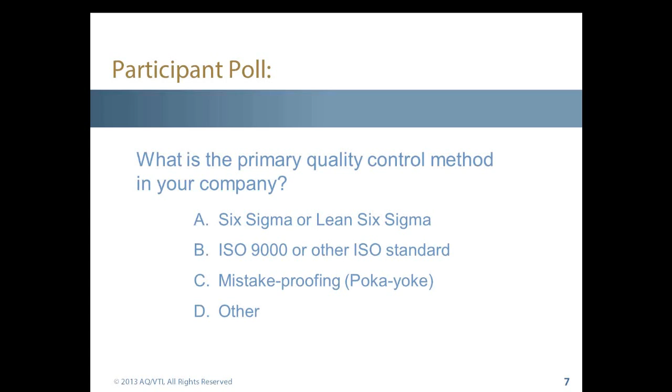The results are coming in, Martin. We'll close it here in just a second. Looks like the results, Martin, 21% Six Sigma or Lean Six Sigma, 49% ISO or other standard, 9% mistake proofing, Poka-yoke, and 21% other. Excellent, thank you.

One of the most important questions that you can ask is, does your quality control pay? In other words, are you saving more than you're investing in your quality control efforts? We're also going to talk about the secrets to mistake-proofing devices and then controlling variation with settings rather than through statistical process control.

This study was conducted by the Xerox Corporation in the 1990s. It included companies that were using Six Sigma, as well as companies that were generally focusing on traditional statistical quality control methods. The data here shows that most companies had defect rates in the range of 1,000 to 10,000 parts per million, and that the cost of their quality control effort, which included scrap, rework, repair, warranty, and quality control, was an astounding 6 to 24% of their production budget. This is the view that quality control is expensive.

Now, what is interesting is that many companies confuse the tools that they're using with whether or not they're achieving outstanding quality control. The difficulty is, for example, there's one company that I know of near me in the Logan, Utah area that claims to be a Six Sigma company, but their own data on the defects in their records is that 8% of the records have defects in them, have errors in them. Well, an 8% defect rate isn't anywhere near the expectations or standards of Six Sigma in terms of the actual defect rates. So outstanding quality control does not depend upon the tool that you use. It is measured in the results that you achieve.

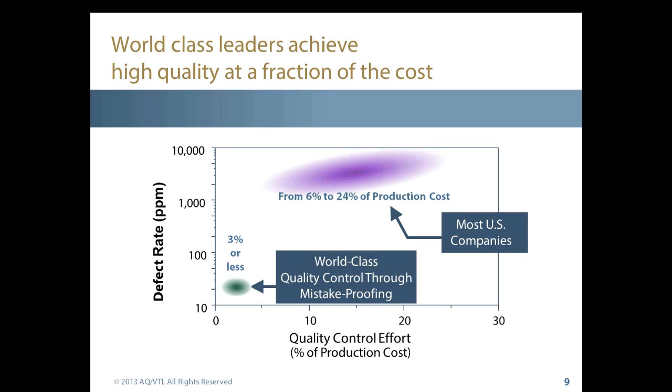This same study concluded, again this was in the 1990s, the world-class leaders in quality control were consistently maintaining their defect rates below 30 parts per million. And these same companies were spending less than 3% of their production budget on scrap, rework, repair, warranty, and quality control costs. This constitutes the view that quality control is free. In other words, what they invest in the quality control effort is almost paid for by the outcome in the results. So these represent the two dominant views of quality control that existed in the early 1990s, that quality control is either expensive or that it is nearly free.

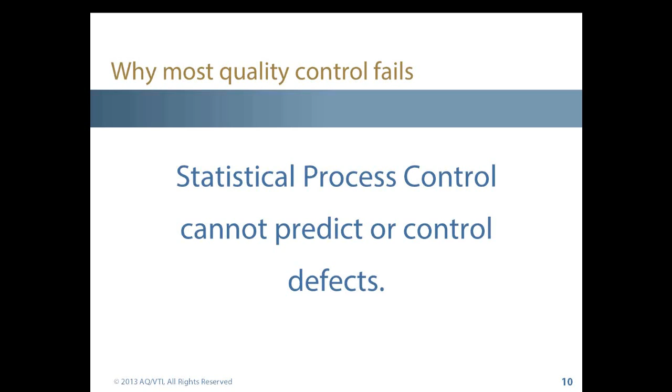One of the questions that we have, though, is why do most quality control efforts fail in the sense of achieving world-class quality? And the rather remarkable reason for this is that statistical process control can't predict or control defects. Now that sounds like a contradictory statement, given that many organizations heavily focus on statistical quality control methods. But the truth is that none of the statistical methods are accurately predicting modern defect rates.

The big problem is that most defects are caused by mistakes, and mistakes are rare random events. They don't happen very frequently. Most defects happen because mistakes happen, and mistakes are rare and random events. You can't predict when they're going to happen. You can't predict how severe the outcome will be when they happen. And because of this, statistics are an ineffective tool in dealing with the problem of mistakes.

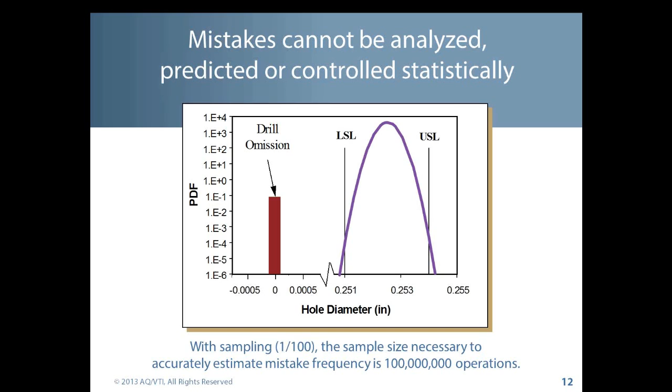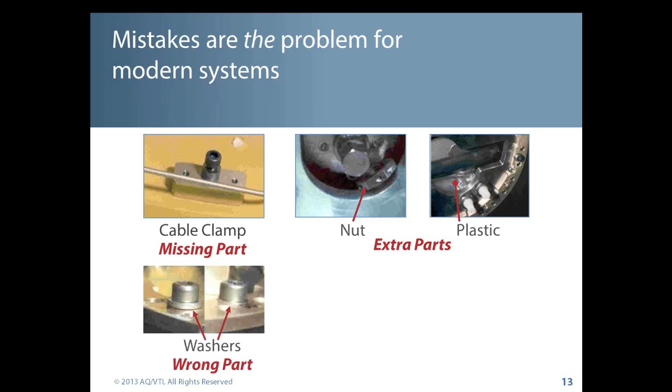Here's a nut that was dropped in a part and left in a part. And then there was a plastic piece that was put in to keep small parts from falling down into the product as it's being assembled, and they forgot to remove the plastic part. There's washers, thick washer or thin washer. If the washer's too thin, the bolt bottoms out and may not clamp the parts correctly. If the washer's too thick, we may not have enough thread engagement.

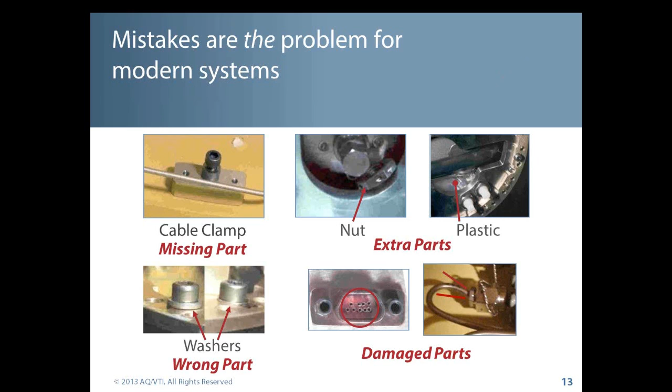We see bent pins, and then on the right, the tube should come out straight, and instead it's bent at an angle that's far off of what we would consider a distribution or variation in terms of the tube alignment. When we started collecting data from actual production processes and what people were having problems with in the field, virtually all of the problems tended to be mistakes.

So the question is, is your quality control like the traditional statistical quality control view? Is it expensive? Or is it like the traditional mistake-proofing view that quality control is free? Today, we're going to introduce some new ways to think of quality control that show that it's not just expensive, it's not just free, but that you can achieve outstanding quality control in a way that pays you to do that.

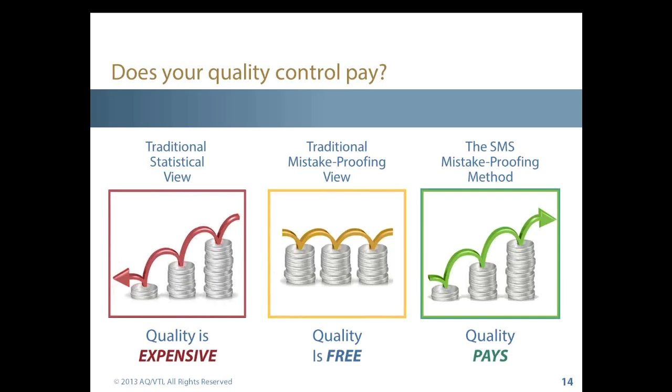So here's our next participant poll. How would you characterize your company's quality control effectiveness? Is it expensive? Do you view it as being free? Does it pay you to do it? The savings are greater than the investment. Or 4, I don't really know where we stand. Please enter your poll response.

The results are coming in. We'll give them just a second here, Martin, and I'll get you the answers. That was a great explanation just a second ago. I'd never seen it explained quite like that.

Looks like the poll... do the participants hear what you're sharing with me on the poll results? Yes, they do.

So the answer to the poll is: 33%, it is expensive. 13%, it is free; costs are balanced by savings. 22%, it pays; savings are much greater than the investment. And 33%, I really don't know where we stand. Very interesting. And that's one of the challenges. A lot of times we don't really know where we stand.

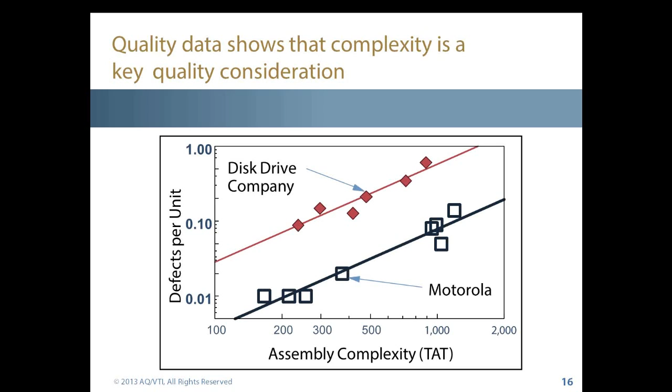Well, this data is useful and interesting. It demonstrates that one of the most important things in quality control is the role of complexity in the relationship to both mistakes and variation. As a task becomes more difficult, we increase the mistakes and the variation that are occurring in the process. And so one of our greatest opportunities in terms of quality control is to simplify the products, the processes, the tools, the equipment, the testing, the instructions, every single thing we do in the process.

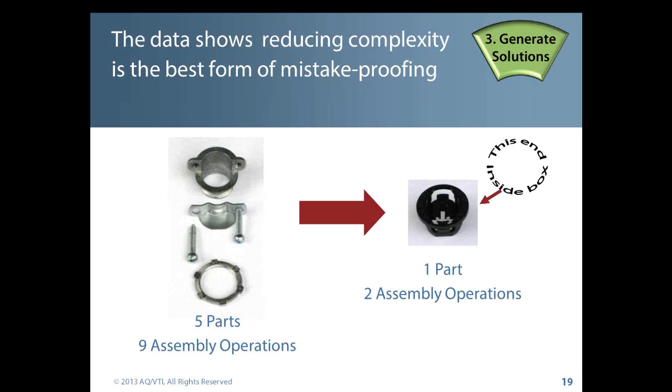By simplifying the products and the design, we eliminate hundreds and thousands of types of mistakes that can occur, and we can't overlook the importance of simplifying processes and products to get to outstanding quality. And this is a huge money saver, and typically the cost and complexity and the assembly time can be cut in half.

Here's just a few examples of real products. These are fairly complex products. This one product is a tapered product. It's made with a scarf joint. The scarf joint isn't vertical, and it doesn't cut straight into the center line of the circle. It's cut at these angles. This set of complex plastic parts, we were paying $5,000 a set, and these parts have been made this way for 20 years.

Well, by redesigning this into a flexible part, the first part we made, including the cost of the mold, cost us $500. And after this first mold was made, the parts cost $20 a piece. The tooling to install the scarf parts cost about $20,000, and the tooling to install the redesigned product cost us $200. It achieved the same quality.

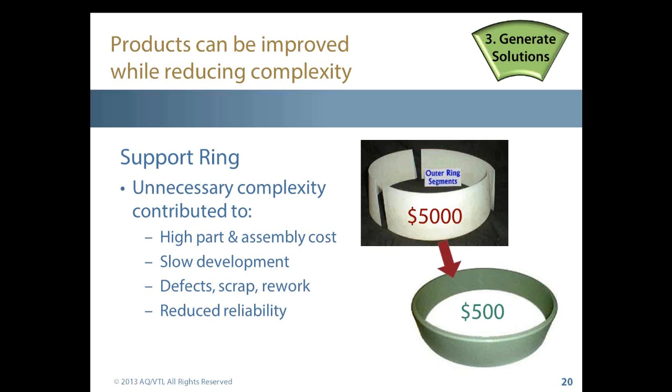The reliability was much higher, and we had fewer defect rates because we had a lot fewer operations. And so it improves reliability, it cuts the costs, we speed up the development, and we have fewer defects, scrap, and rework.

Here's an example of complexity that we see in typical processes. We went into one facility, and they have andon lights, which is based on the Japanese model, that show the status of a production line. You notice the controls here, though. There are 7 buttons, 3 knobs and 2 key controls. And the problem is you can set the machine wrong. You might not have the key handy when you need to change it. The controls are extremely complex.

Here's a better solution. Here's a case where you take the knob in the center and you just turn it to the pointer, and it lights up at the top where you set the pointer. You can look at the pointer and read and interpret what the lights mean. But there's one other problem here. Notice that below this there's a board where the workers bring their tags.

If they have a problem, they have to come to this board and switch the light to show what's going on, and then change the tag to show where the problem's at. The difficulty is the workers are leaving their work when they have a problem to come and set the andon lights. That's not the intention of andon lights.

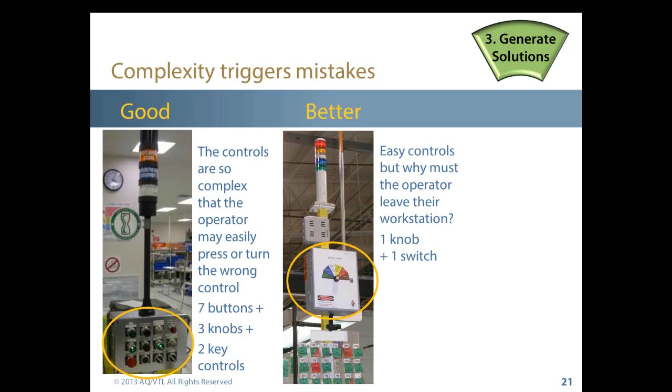The andon lights come from the andon cord shown here on the right. The idea is if you have a problem, you pull the cord. In the automotive industry, the original implementation, the line would not stop for 60 seconds until after the cord was pulled. There's much simpler solutions.

We could have at each workstation a red light to show when I have a quality problem or an assembly problem, a yellow light to indicate that I'm running low on supply of parts, or I can have a green light to reset it, and then the andon lights at the end roll up the conditions along the line.

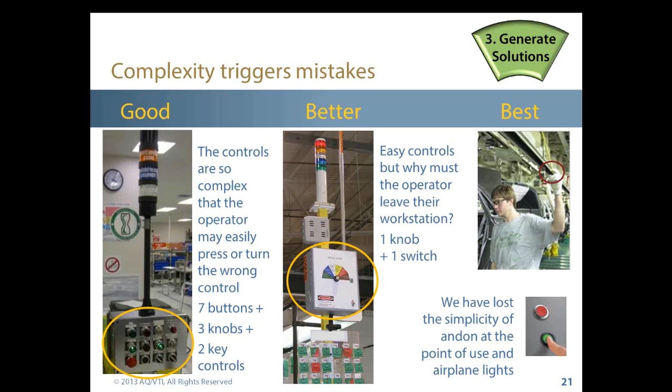You see how simple a set of lights or an andon cord are versus the operation of these complex andon lights on the left. We always are looking for making products, processes, everything we do simpler, easier, less expensive. So here's the next question. Six Sigma problem-solving method, DMAIC, is very effective in mistake proofing and in simplifying products and processes. True or false?

Okay, it looks like 54% true, 46% false. Six Sigma, the DMAIC method is not very effective in mistake proofing. And the DMAIC method is also not particularly effective in making products and processes simpler. We'll show you a method that will help you address some of those concerns.

One of the questions that came in is, where did the data come from for those 600 companies? We were doing a study. I was working with the University of Utah, teaching in the business school, and we were working with a major aircraft manufacturer, and they provided the data for an entire year for every single company that provided products to that aircraft manufacturer. So it's a very large set of data. It included every quality problem that they encountered for a whole period of a year.

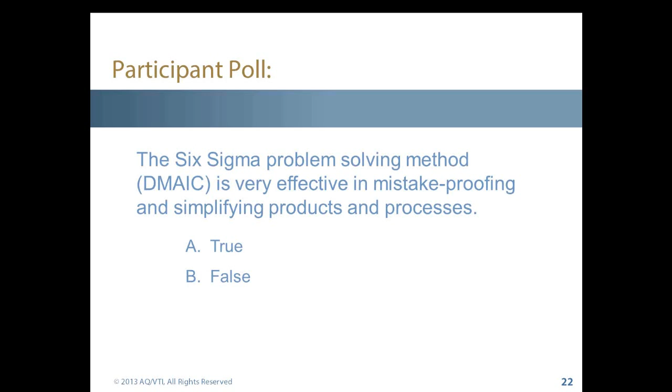Okay, so the SMS mistake proofing method, 6 steps to world-class quality. What do we need to do to get there? Well, the first thing is, like many other steps, we discover and select the problems we're going to work on. We analyze the problem. But the next 2 steps are the things that change from getting good solutions to getting great solutions. The first is that we require that you always generate many solutions.

There's always at least 5 ways to solve every problem. You never know if you have a great solution until you've generated 5 and do a comparison and selection. What we do is compare. We blend the best attributes of the concepts that we generate and then select the best solution.

We deploy it, and the next step that is a little bit different than DMAIC is that there's an evaluation, and from that evaluation we share that with the intent that others can take advantage of it so that it can be deployed broadly. This simple pattern results in outstanding improvements in products, concepts, mistake proofing methods, and every type of method you have as you approach quality control.

I'd like to talk just briefly about devices that control mistakes. Most of the training approach to mistake proofing is to show a lot of examples. Unfortunately, presenting a bunch of examples has very limited effect in helping people develop mistake proofing solutions. We've seen many cases where we show a bunch of examples and then ask people to create a mistake proofing solution, and they have great difficulty doing that.

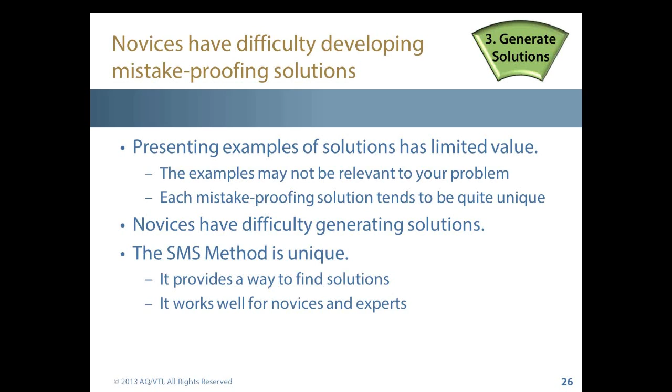Our SMS mistake proofing method is quite unique. It provides a way to find solutions, and it works as well for novices as it does for experts in mistake proofing. So what do we do that's different?

Well, the first thing is we classify the problem. There's these 5 major classifications, and then under them some sub-classifications, but we try to identify what was the outcome of the mistake, not the causal factor, because we can't control all the causal factors. What was the outcome? It could be something like an omitted part, or we committed a prohibited action, committed something that we shouldn't do.

From that classification, we have developed a set of solution methods. We then review the solution methods that are useful in fixing the problem that we've identified. What this does is it narrows down our search. Instead of having to look through all the possible ways to solve a problem, we have a very finite set, a small set of ways to look through to solve that specific problem.

And then we use that to find examples. We find an example of how someone translated this solution method into a real solution. It may not always be in our industry or field, but it gives us an idea of how that method has been translated into a concept.

Mistakes have been classified in lots of different ways. They've been classified by behavioral factors, causal factors like fatigue, priority, or interruption, cognitive factors, errors in thought processes, human error probabilities, stress factors, workload, life changes, frustration, environmental factors, noise, lighting, mistake consequences, injury, loss, damage, delay, or corrective action, rework, repair, or scrap.

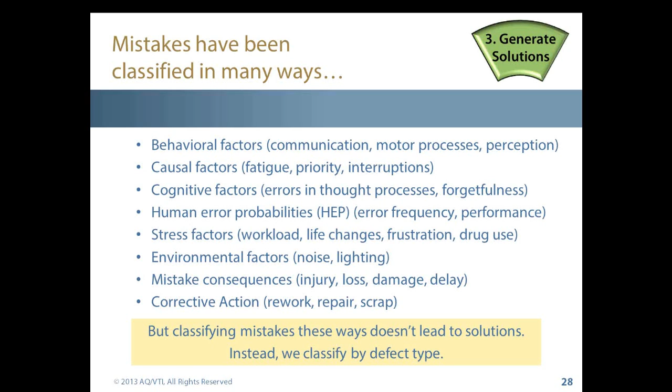The problem is that classifying these mistakes in these kind of categories doesn't help us in any way to come up with outstanding mistake-proofing solutions. They don't lead us to the skills that we need to come up with mistake-proofing examples. So we classify them by defect types. We don't have time today to go through all of those. We'll show you just a few brief examples.

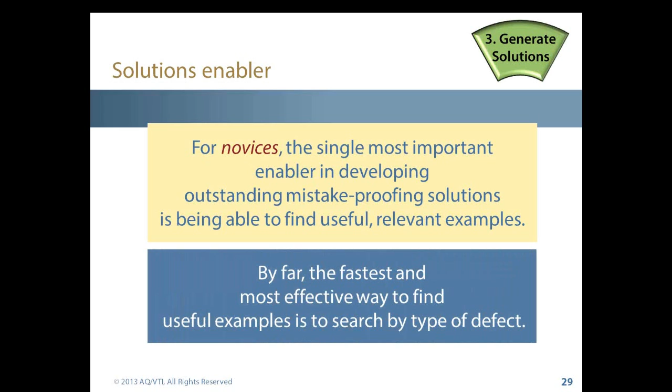But the key for novices is that the single most important enabler in developing outstanding mistake-proofing solutions is being able to find useful, relevant examples, to find a solution that is like the solution I need to solve my problem. And the most important way and the fastest way we found to do that is to search by type of defect. So here's 5 basic defect types.

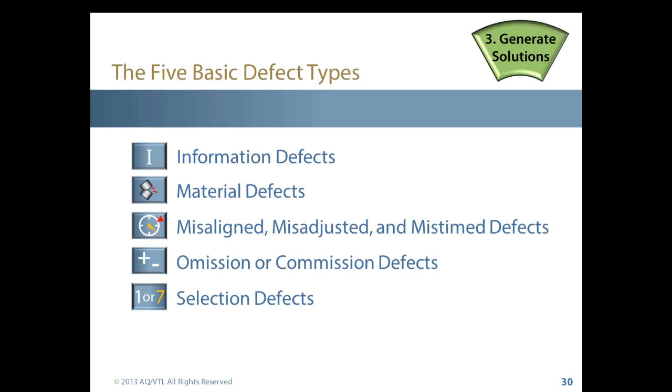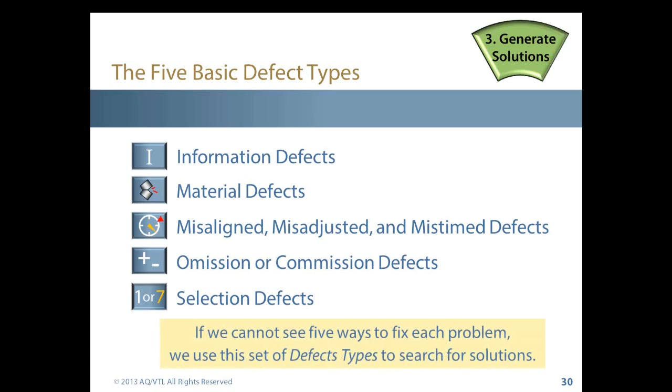I'm going to illustrate one major classification, show you how we break that down into subclassifications. If we can't see 5 ways to fix it, we always try to classify a defect into at least 2 different ways. That gives us different ways to solve the problems.

We have 2 substantial resources. One is Make No Mistake. It contains over 200 examples that are sorted by classification, so you can look up examples. We're getting ready to launch a new product that is an online classification tool, and it's available at no cost, where you can look up and find examples. You can search in many different ways. There's 400 examples. It's easy to search and look up.

It's very easy to enter and add examples to the database. The total data entry time takes about 15 minutes. In one page, you see what the problem was, when it was solved, where it is located, what team solved the problem, the evaluation. Did it prevent the defects? Was it low cost? Did it improve output? Does it require a lot of upkeep?

How the problem was inspected, how it was controlled, and then a before description and after, preferably with the pictures, that also will show how you classified it and the solution method used. Now, this database is searchable by keyword, by title, by before and after descriptions, by the results. The total data entry for a problem takes less than 15 minutes.

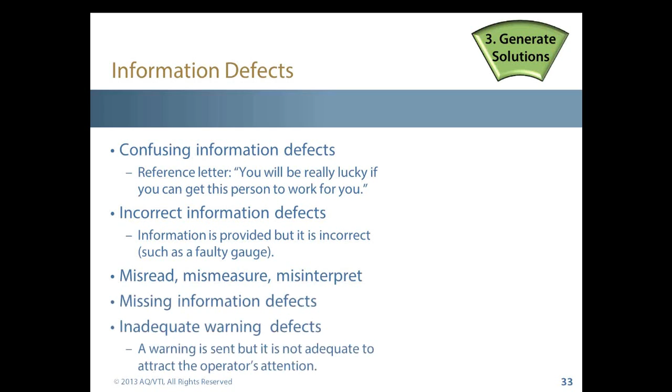Incorrect information. Information is provided, but it's incorrect, such as a faulty gauge. Misread, mismeasure, misinterpret. You have the information, but you didn't read it correctly. You have missing information defects. The information isn't provided at all. Or an inadequate warning. A warning is given, but it's not adequate to get the attention of the operator.

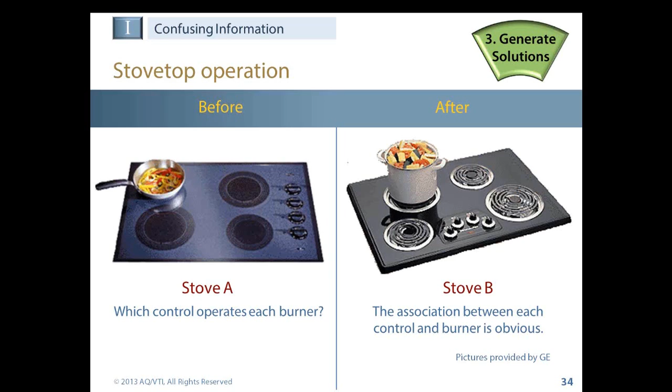It also illustrates, however, the importance of thorough mistake proofing. There's one extremely serious problem here. If I lift that pan off the stove, and as I'm lifting it towards me, the bottom of that pan hits one of the control knobs, the boiling water, I can dump that right down the front of me. Now, GE stopped making this stove, and I'm sure it's probably because of that problem. The problem could have been solved by making control buttons that are flush on the surface, and then there wouldn't be any problem at all. But I've seen recently that a manufacturer out of the country is starting to sell this type of stovetop in the United States again.

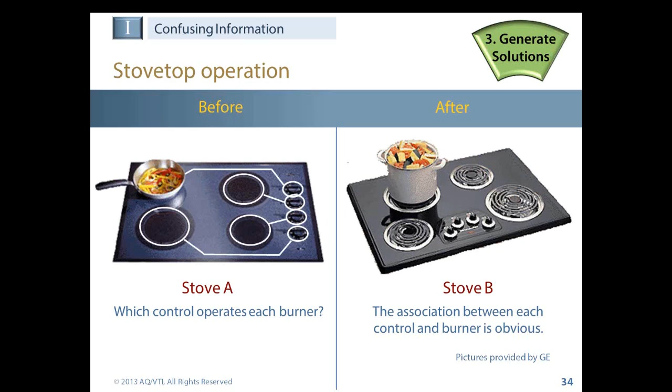One trip I was on had burners, and it had a circle around the control and a line over to the device it controlled. A lot of times we can't change the equipment, but simply by changing the marking we make it obvious which control operates which device.

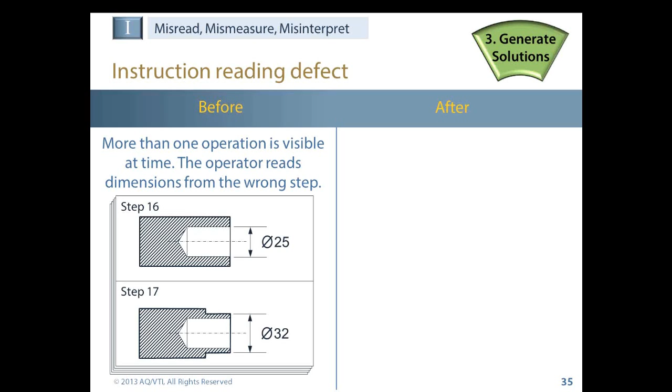Misread, mismeasure, misinterpret. This type of problem is common. The person is executing a step. They're supposed to be drilling a hole. They're on step 16. Work on the equipment, glance over at the instructions, and they read 32 on the diameter, cut the part. Now the part's scrapped. It can't be repaired.

To solve this type of problem, the solution is very simple. You should ideally have only one step visible at a time. You may have preceding and subsequent steps in much smaller print on the page, but there should be one large page of the explanation of the step that you're on, so it's not easy to get confused on where you're at. And ideally, this should be vertical so it can be read across the room. A lot of times you have to do the task away from the instructions.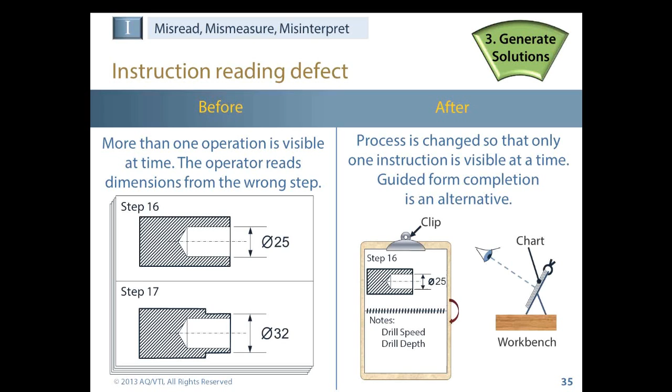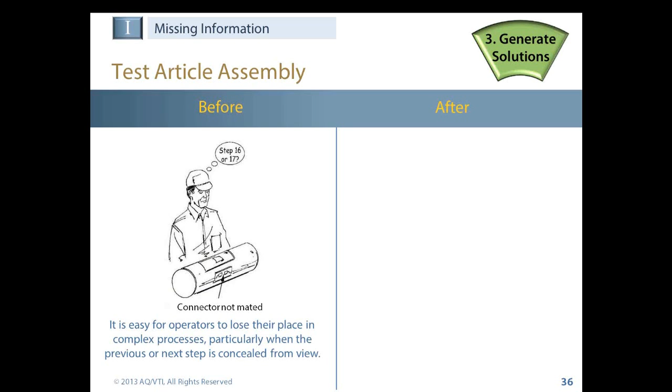Missing information. A person was performing an assembly, and someone came into the room and said, "I'm sorry, your spouse just went to the hospital. You need to leave immediately." He was distracted, left. Someone took over the assembly. They missed one step. They failed to connect a connector. This was on a destructive test of a multi-million-dollar article. It was a pull-down test where it slammed into the ground at 200 miles an hour and is completely destroyed, and they didn't get any data out because this one connector wasn't mated.

Again, if you have one instruction visible at a time and you can't advance until that instruction is completed, when another worker comes up to that equipment, they know exactly where you are in the process. They don't get confused on where you are or what the next step is.

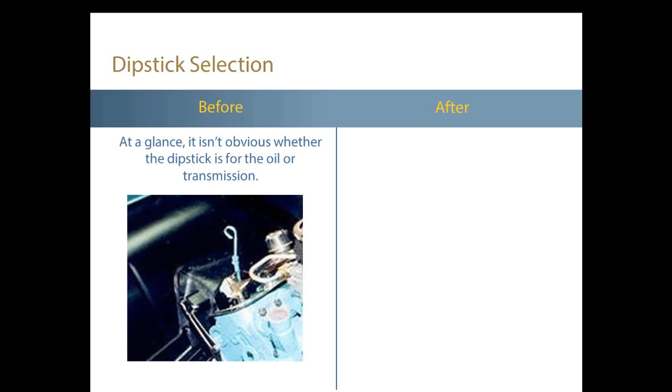Here's the dipstick selection. What is this dipstick for? Is it for oil or for transmission? If you get them confused, you can put oil where the transmission fluid goes and ruin the vehicle.

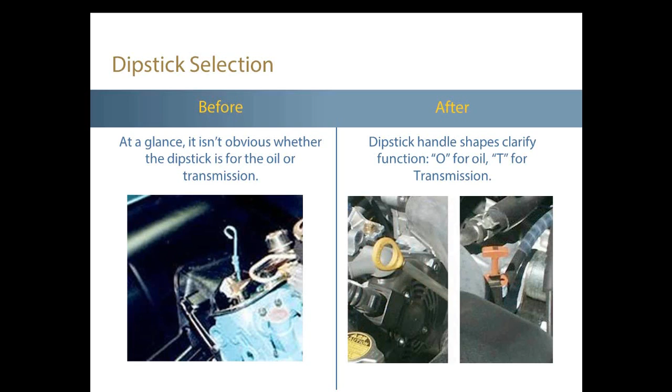Well, here's how one company solved it. They put O for oil and T for transmission. This only has to be explained once, and it's very easy to get this correct. And the dipsticks are made so they're completely non-interchangeable.

Once we classify the problem, we use the classification to find alternative solutions for our problem. After selecting a problem, we classify it to develop solutions, 5 solutions if possible, by first reviewing solution methods that have succeeded in solving similar problems. And the methods are grouped by classification in solution sets. And here's 6 of more than 50 ways that you can prevent things being put in the wrong orientation.

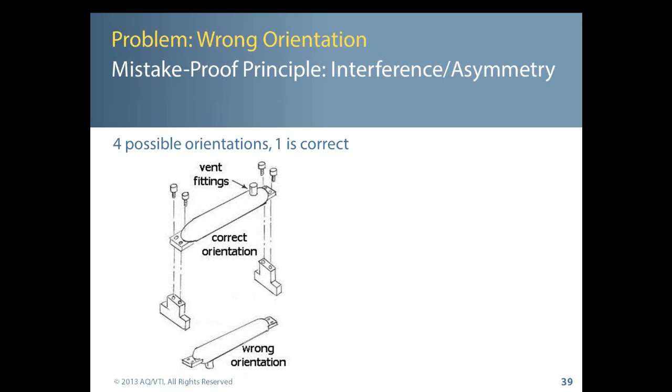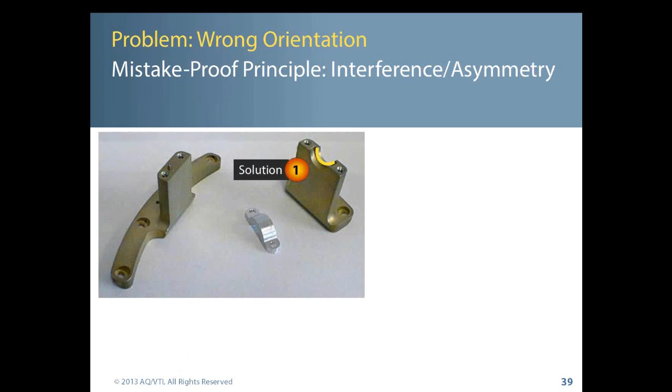Here's a vessel that needs to be attached. You notice it's got 4 mounting screws. The fittings are the same. It can be put in upside down, and it could be put in with the vent fitting on either end. 4 ways, only one of which is correct. Here's the way that this problem was solved. The fittings and mountings on the 2 ends are opposite. Notice the yellow line for the circular connection, the flat on the other end.

And then on the bottom, it was designed so that there was an offset pin that went around this conical surface, so the fitting could only go in one place on the bolt pattern. This cut the assembly time from 2 hours to 7 minutes. It eliminated lots of fixtures that were added and removed to prevent parts from being installed incorrectly, and it completely eliminated the problems of getting the parts in the wrong orientation.

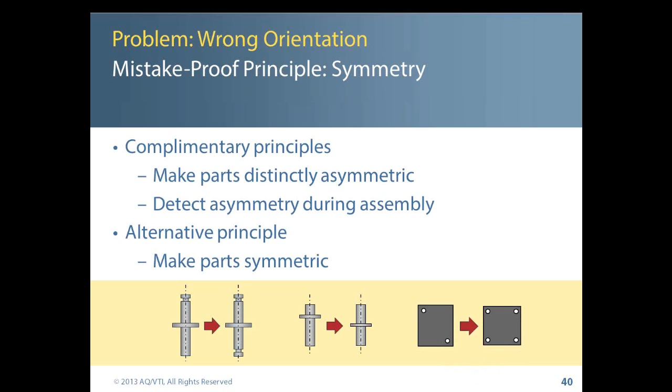An alternative solution is to make parts symmetric. We can put a snap ring groove on both ends so it doesn't matter which way we put it in. Or we can move a rib so it's in the middle rather than non-symmetric. Oftentimes, ribs are just slightly offset, and if they just made them a little different, they could make it symmetric and eliminate the mistakes as well as reduce the cost of making the parts. Instead of having 2 holes, where we could put it in upside down, we could have 4 holes. So we always have the right holes, or we could put maybe 1 hole in just the center.

So my next question is, is Toyota a Six Sigma company? True or false? Toyota is a Six Sigma company.

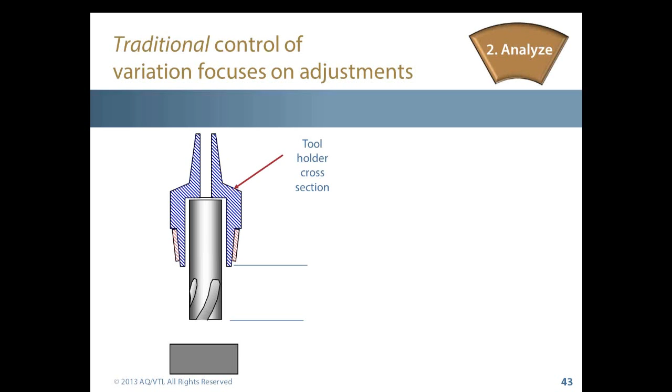They don't use Six Sigma to control variation. And we're going to talk about how to control variation without statistical quality control methods, by turning adjustments into settings. Now, in the traditional method of making a product, think of this as a tool holder and a tool in a milling machine. We don't see the motor and the head and the equipment. We're going to cut a groove in the part, which is going to slide out of the screen towards you as the tool is turning. We're not going to show the turning, but it's turning as we cut it.

We cut the groove, and when we finish cutting it, the tool is not exactly the same as when we started. It's worn a little bit, and I'm going to greatly exaggerate the wear. But when I take it out, it's not in the same starting position. Now, it may be good enough to make 5 or 6 parts, and the tool may not be worn out, but what I do so that I can make good parts and make some more parts without throwing the tool away is I adjust the head, the tool holder, and the tool downward.

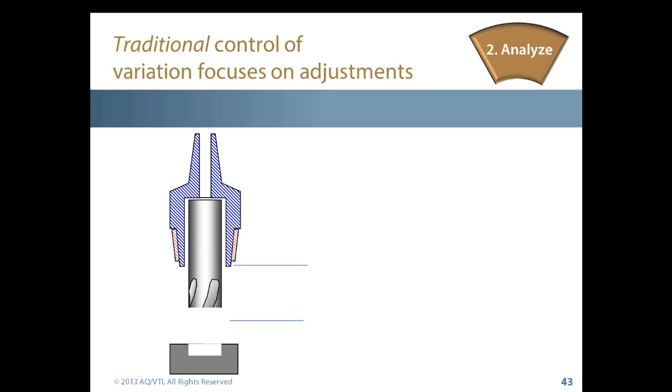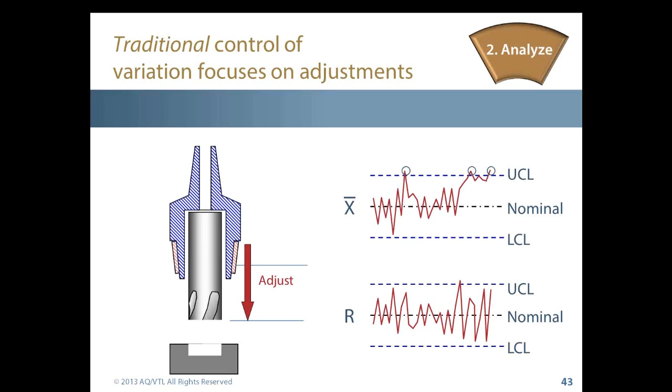I make an adjustment. And statistical quality control is all about rationalizing when and how to make adjustments. I look for conditions that are out of control in terms of the X bar or the mean, and that's the circle points outside the control limits, and the range. And whenever I wind up with a point outside of those values or a trend or other kinds of anomalies, then I make a decision about whether I need to make an adjustment. That's the way that traditional statistical quality control methods work.

However, the whole problem can be avoided by converting our adjustments to settings. Here's how they do that in terms of the wear of something like a tool like this. We use the same kind of process. We have a milling head, tool and tool holder, and the part we're machining. We cut the groove in the part, and it's worn. And every 5 parts we cut, or 10 parts, or whatever the right number is so I make the part with the right precision, I take the tool holder and the tool off the machine.

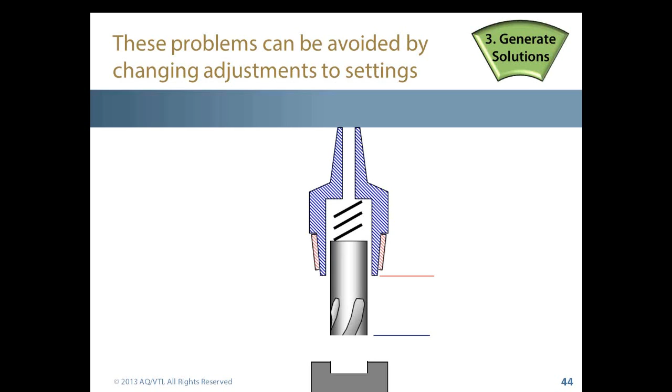I release the grip that is holding the tool, and the spring pushes the tool down to a setting block. And then I retighten the grip and put the tool back on the machine. Several things have happened that are very different. The head and the relationship with the bed of the machine and the work pieces has never changed. Only the tip of the tool has changed. And now it's done by a setting. It's done upstream of the process rather than downstream. So here's what I've eliminated.

Mikel Harry and Richard Schroeder, when they were analyzing variation, concluded that the Japanese had less variation, but they assumed that they were doing it with statistical process control, and that's not correct. They were not doing it with statistical process control. They were doing it with settings.

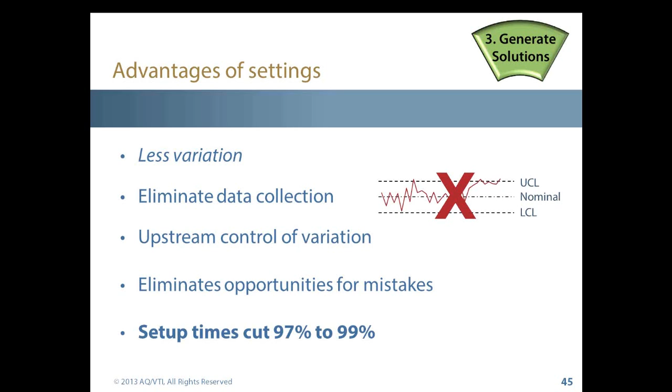We eliminate the data collection. We control the process upstream of the variation. We eliminate most of the opportunities for setup mistakes. About 98% of the setup mistakes can be completely eliminated. And we cut the setup times by 97 to 99%. In other words, the setup times take 1% of the time it used to take when we were controlling processes with statistical process control. So here's an example.

KC-135, they spent $100 million refurbishing this aircraft. They're pumping it up, pressurizing the airplane. The pressure comes up. There's no peg on the gauge. It goes past that. The worker comes up and says, oh, we're not up to pressure yet. He walks away, and the plane ruptures like a balloon. $100 million loss because the plane was overpressurized. They were doing a pressure test. You have to pressure test an airplane because it goes from low altitude to high altitude.

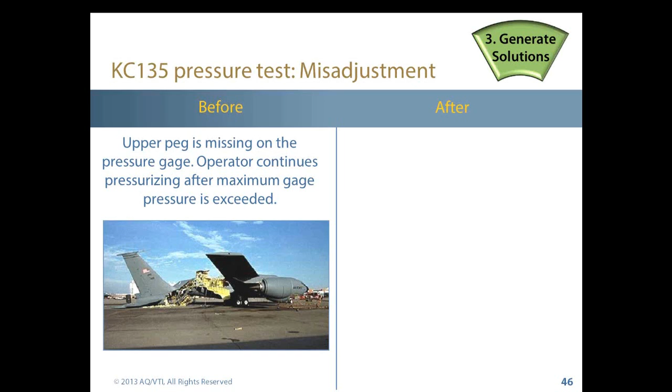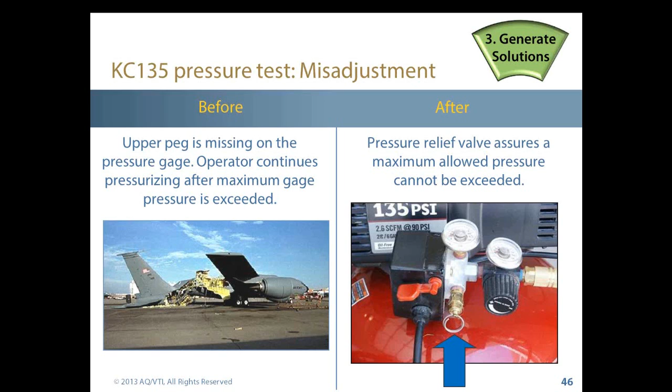Simple solution is to have a pop-off, a burst disc, pressure relief kind of thing so that you pressurize to a setting. The setting determines when the pressure is reached. When it breaks the burst disc, it could whistle and tell you that the task is done. But you should pressurize to a setting and not by an adjustment.

One of the most important things that you can do is to convert your explanation of your problems to one-page reports. You can develop one-page reports in your own company that describe the before and after conditions, that put the information available. Instead of sharing how bad a job somebody did, that Joe made a mistake and it cost the company this much, show people what you've done to fix the problems. Put the positive on it. I did this. Our team did this. It can change it from the negative to a very positive experience in terms of quality control.

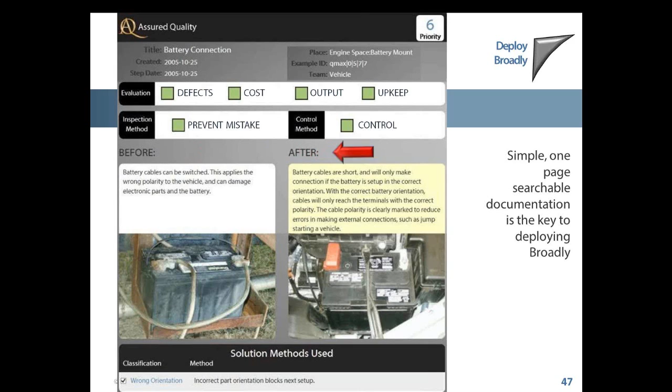We have on one page the part, the problem, the evaluation, the priority. We have the inspection method, the control method, the description of the before and after, ideally a picture. We have a description of the method for the solution.

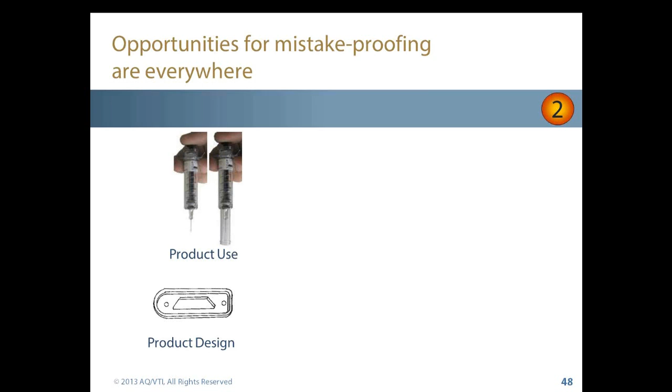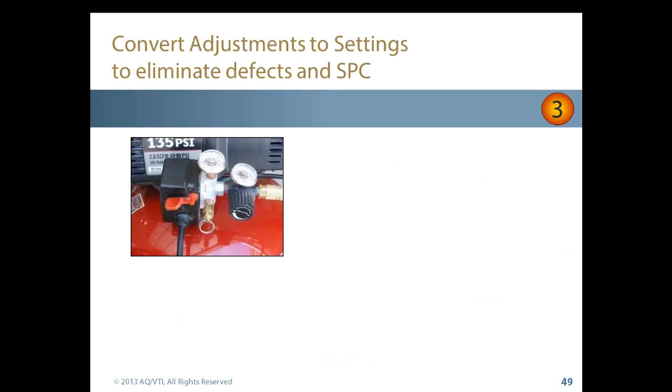There are mistake-proofing opportunities everywhere. They're in the product use, in the product design, they're in the production equipment, they're in the process, they're in the information. Lots and lots of opportunities everywhere you turn. We work always to convert adjustments to settings. We eliminate the need for statistical process control.

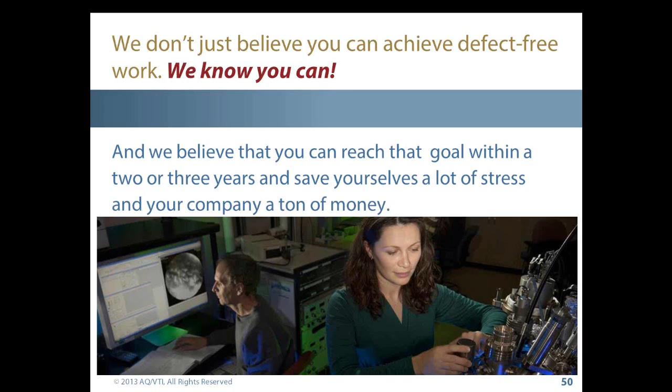And we don't just believe you can achieve outstanding quality. We know that you can. You can do this in a remarkably short period of time, and it saves yourself a lot of stress and your company a ton of money. The SMS method is the only method that dramatically improves quality and saves money.

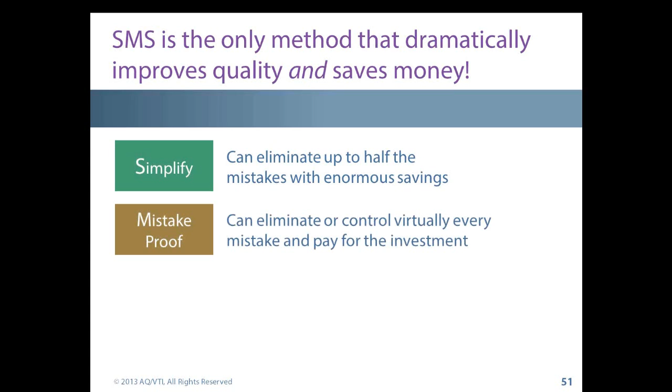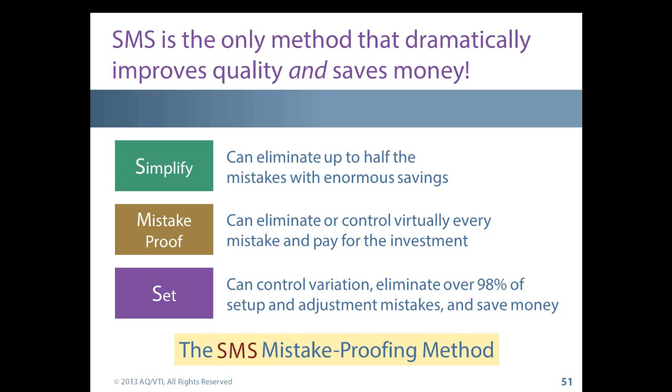Simplifying can eliminate half the mistakes with enormous savings. Mistake proofing can eliminate or control virtually every mistake and pay for the investment. And setting can control variation, eliminate 98% of the setup errors and setup time and the adjustment mistakes in making adjustments. And so the SMS method is the way that you get to outstanding quality and do it at extremely low cost. That is what constitutes world-class quality.

So what is the purpose of a strategy or a huddle if you never pass, kick, run, or score? The whole purpose is not what you know about quality, it's what you do about fixing your quality problems, and I want to emphasize that.